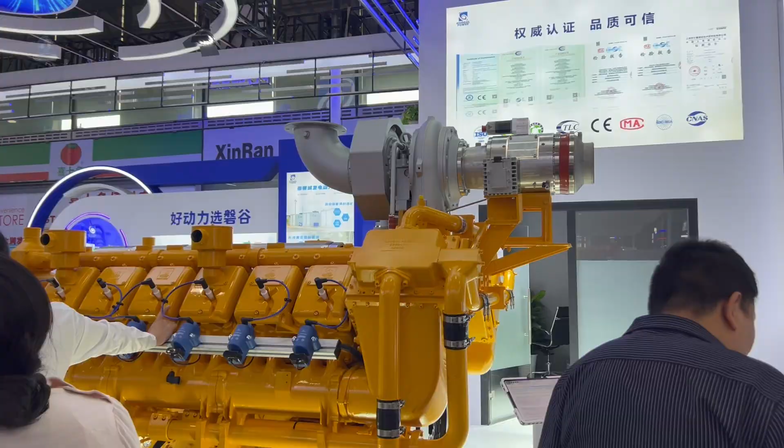Hey guys, welcome back. If you still think China's marine equipment relies on imported core tech, this 2026 SIA Shanghai Marine Expo will completely change your mind.

Brand new domestic gas turbines, upgraded dual fuel generators, and zero-carbon ship systems are now fully mass-producible, ending decades of Western technological dominance in high-end marine power hardware.

For generations, global high-value marine equipment was controlled exclusively by European and American industry giants, with Rolls-Royce, MAN Energy Solutions, and Wärtsilä locking up over 70% of the world's core marine power market before 2025.

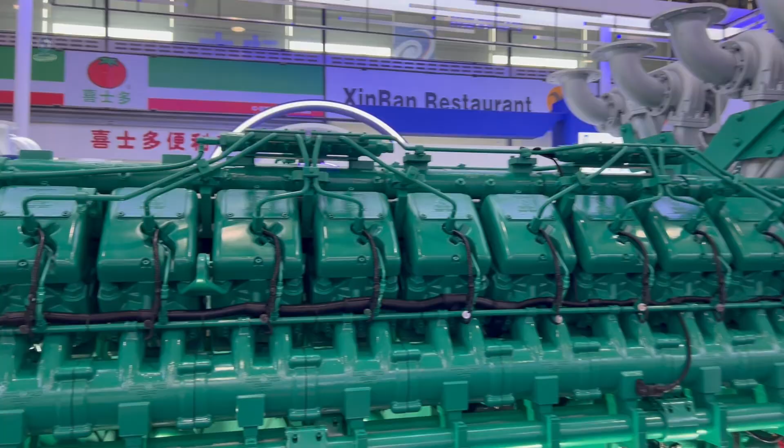These foreign firms controlled every critical link, from high-temperature alloy material formulas and precision processing craftsmanship to intelligent control algorithm frameworks, forcing global shipyards to rely entirely on imported equipment and pay sky-high patent and after-sales fees.

But 2026 marks a definitive turning point. Full-scale domestic technological breakthroughs have shattered long-standing Western monopolies, reshaping the entire competitive hierarchy of the global marine manufacturing industry.

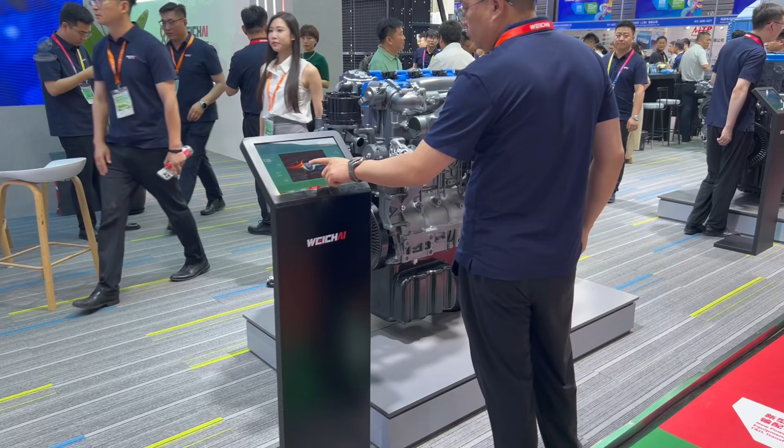Today, we're doing a pure technical deep dive, breaking down every key parameter, performance upgrade, and global industry shift you missed at this exhibition. We'll integrate the latest 2026 authoritative market data, cross-brand global benchmarking, supply chain competition analysis, and long-term industrial forecasts to deliver a fully objective, data-backed industry review.

No corporate PR spin, no exaggerated marketing hype. Only real mass production-ready technology and verified market trends. Let's get straight into the data.

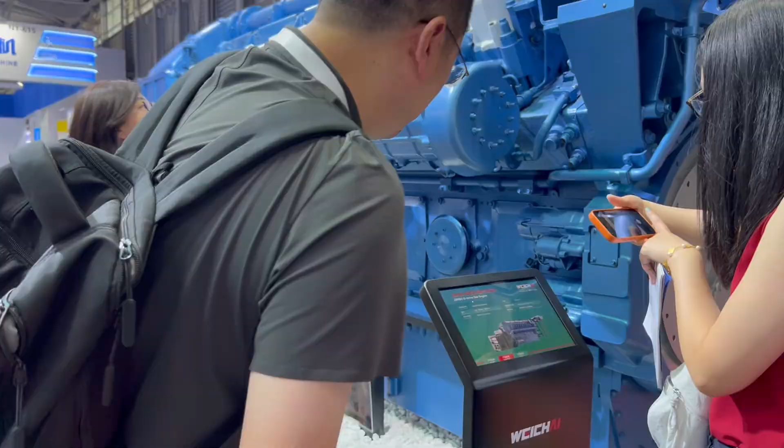I actually flew into Shanghai specifically for this show earlier this week, and the vibe here is completely different from years past. Walking through the vast exhibition halls at Shanghai New International Expo Center, you can instantly feel the shift.

Foreign booths are no longer the center of attention, and crowds are swarming the domestic equipment zones, checking out fully mature, mass-producible marine hardware. The 2026 SIA Shanghai International Ship and Offshore Engineering Equipment Exhibition officially ran from June 3rd to 5th at this venue.

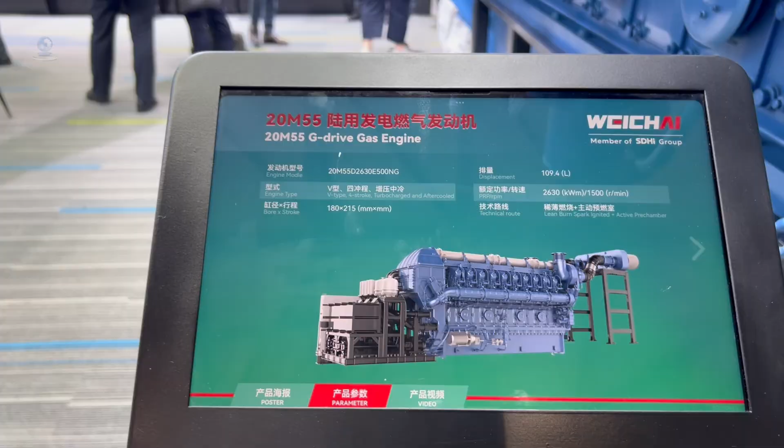As the largest and most influential professional marine industry event in the entire Asia-Pacific region for 2026, this expo covered a total exhibition area of 45,000 square meters, gathering 680-plus top-tier marine equipment manufacturers from 32 countries

and regions worldwide. It attracted over 42,000 professional visitors, including global shipyard procurement teams, offshore energy engineering contractors, maritime operation enterprises, and industry research institutions.

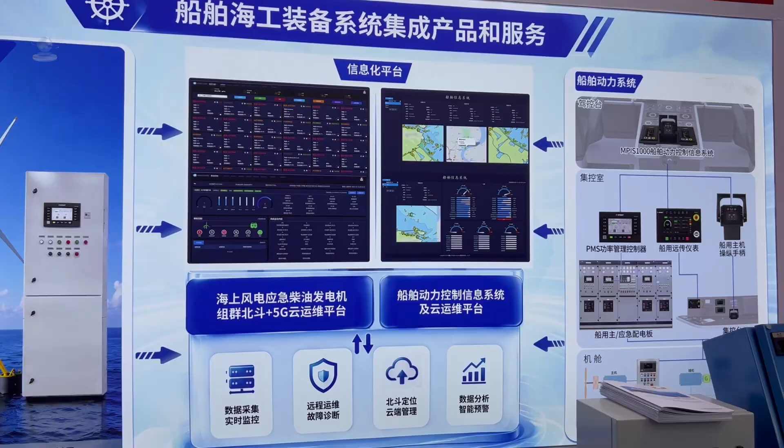Compared with the 2025 exhibition, overseas exhibitor attendance surged by 38%, and on-site intentional transaction volume exceeded $2.8 billion, hitting a 5-year historical high, fully demonstrating its status as a core weather vane for global marine industrial development.

The show focused on 6 core categories: marine gas turbine power systems, large marine generator sets, marine electric propulsion tech, offshore engineering hardware, intelligent shipping solutions, and zero-carbon green ship power systems.

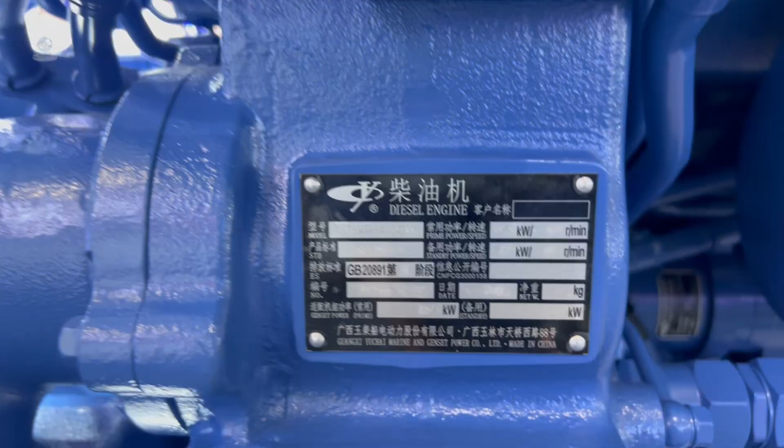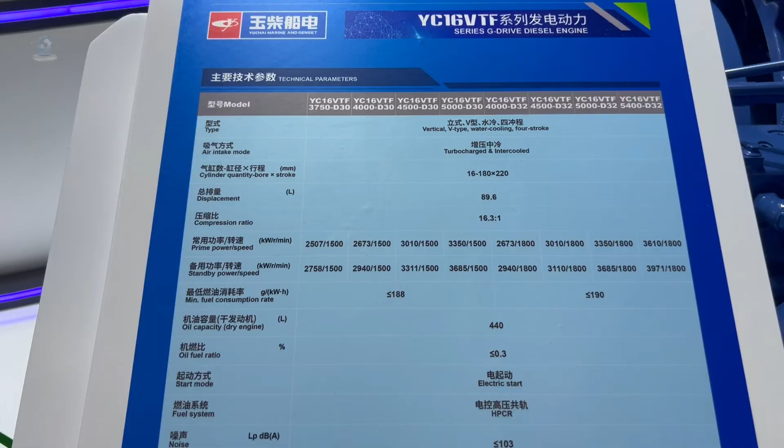Unlike previous expos that prioritized conceptual prototypes and experimental technologies, the 2026 SIA exhibition centered entirely on commercialization, mass production, and practical industrial iteration. Every displayed piece of core equipment has obtained complete International Classification Society certifications, including DNV, ABS,

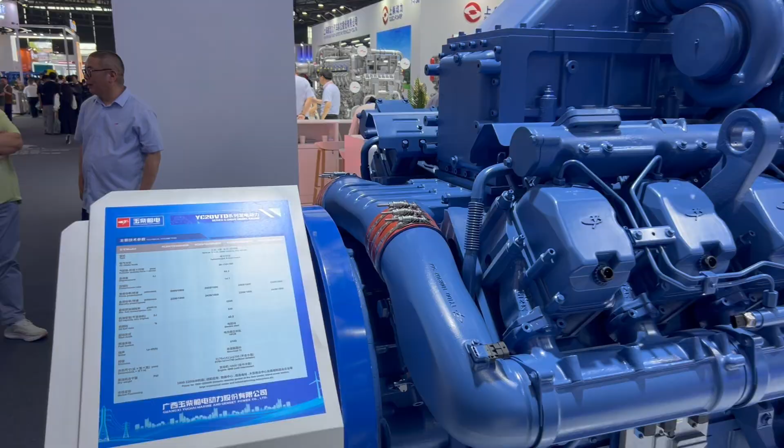and CCS, supporting large-scale batch installation and global shipping operation, representing the highest practical manufacturing level of the current global marine equipment industry. From an objective global industry perspective, this expo perfectly showcases how fast China's high-end marine power and offshore engineering equipment are evolving, and just how much domestic tech has improved in recent years.

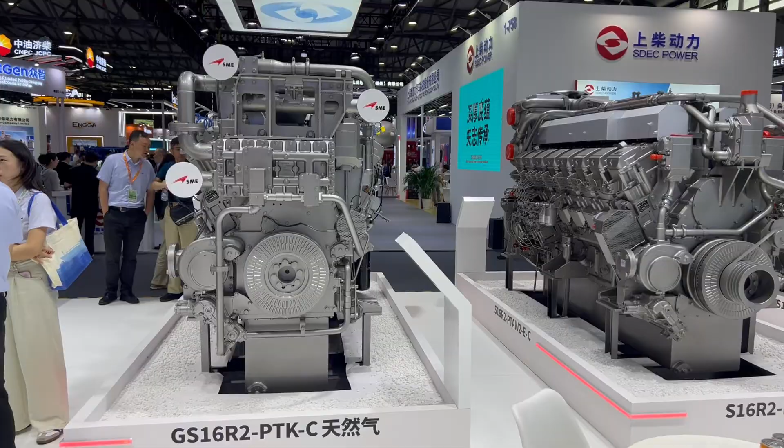According to 2026 authoritative industry data from Clarkson's Research and Coherent Market Insights, the global maritime sector market size has reached $1.72 trillion in 2026, with a projected compound annual growth rate of 5.77% from 2026 to 2035, expected to surpass $3.01 trillion by 2035.

In terms of market competition pattern, China has maintained its position as the world's top shipbuilding and offshore equipment manufacturing country for 16 consecutive years.

By mid-2026, China's global new ship order volume and offshore equipment market share have broken 69%, far outpacing South Korea's 12% and Japan's 8% combined market share.

Most importantly, the localization rate of China's high-end marine core equipment has skyrocketed from 48% in 2023 to over 70% in 2026, marking a historic end to the era of core technology dependence on foreign imports.

Part 1. Marine gas turbine core technology and parameter breakthrough.

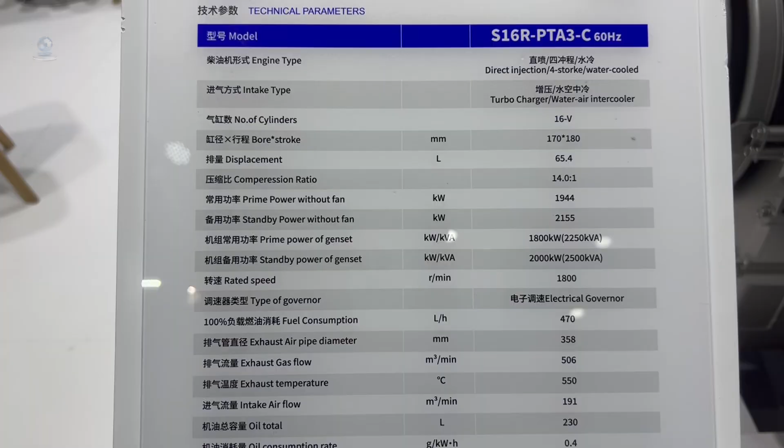Marine gas turbines are widely regarded as the most technically complex core hardware in the marine power space, serving as the ultimate benchmark to measure a country's high-end marine manufacturing comprehensive strength.

Compared to traditional diesel engines, they offer way better power density, faster startup, far less vibration, and cleaner emissions. That's exactly why they're the top choice for ultra-large container ships, LNG vessels, high-speed passenger ships, and advanced offshore engineering vessels.

For decades, the global high-power marine gas turbine market was strictly monopolized by GE's LM-2500 series and Rolls-Royce's MT30 series, with Western brands controlling over 90% of global market share and imposing strict technical blockades and patent barriers on emerging manufacturing countries.

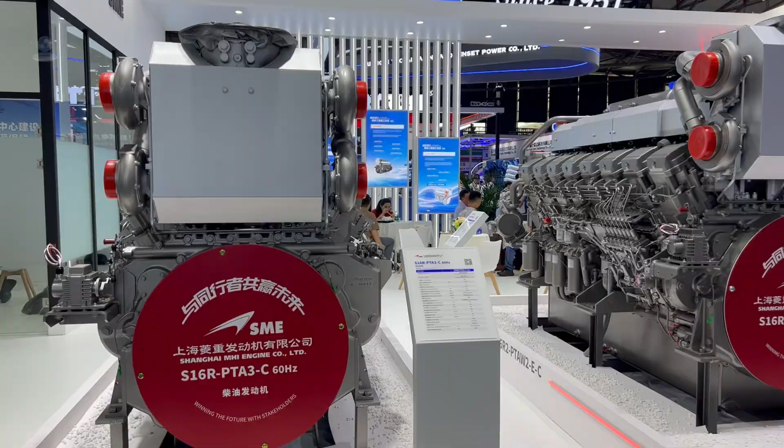The 2026 SIA exhibition completely breaks this long-term monopoly with fully localized, mass production-ready domestic gas turbine models. At this SIA exhibition, the upgraded domestic heavy-duty gas turbine model GD25000 was fully displayed, representing the pinnacle

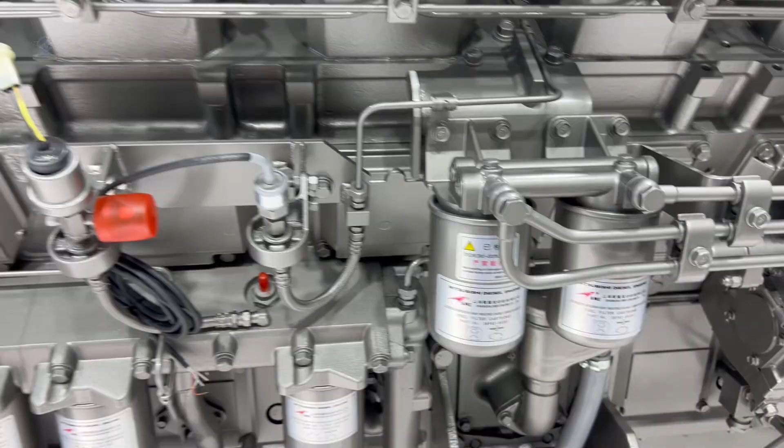of China's independent research and manufacturing capabilities for heavy-duty marine gas turbines.

The improved GD25000 unit reaches a rated power of 25 megawatts, equivalent to 34,000 horsepower. Its standalone thermal efficiency reaches 38.5%.

The combined cycle comprehensive thermal efficiency breaks 52%. The unit's stable operating speed is 3,000 revolutions per minute, with a stable exhaust temperature controlled at 520 degrees Celsius. This core performance index is completely comparable to GE's mainstream LM-2500 gas turbine, reaching the world's advanced level, and even

surpassing foreign products in comprehensive energy efficiency and operational stability. This gas turbine supports dual fuel switching between diesel and LNG. Its NOx emission index is controlled below 100 milligrams per cubic meter, fully meeting the latest IMO Tier 3 international marine emission standards. The total weight of the complete unit is controlled within 18 tons, achieving extremely high power density performance. This model is mainly applicable to 15,000 plus TEU super large container ships and large offshore engineering platform power systems, perfectly solving the long-standing high power supply bottleneck for China's ultra-large marine equipment.

In addition to heavy-duty gas turbines, the exhibition also displayed the QD70 aviation-derived light-duty gas turbine, filling the long-term domestic gap in high-performance light marine gas turbine equipment. The QD70 light gas turbine achieves a rated power of 7 megawatts, with a comprehensive thermal efficiency of 35%. The overall dimension is 3.2 meters in length, 1.8 meters in width, and 2.1 meters in height, with a total weight controlled under 6.5 tons.

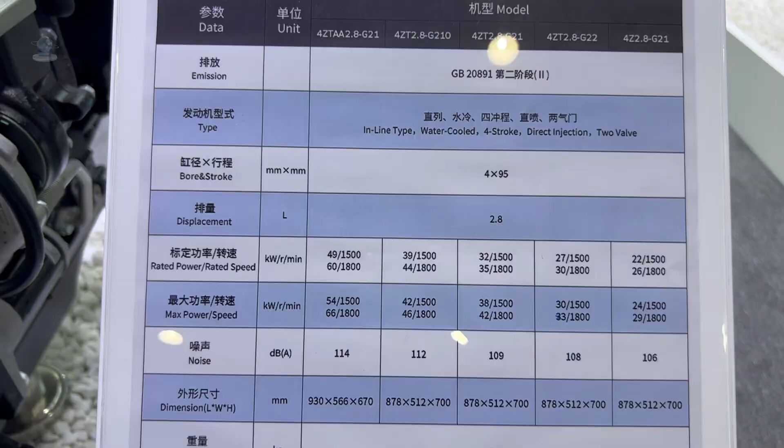Its ultra-compact structural design enables flexible installation in narrow cabin spaces that traditional heavy-duty power equipment cannot adapt to. Its core advantage lies in ultra-fast startup response, completing full startup and stable power output within 60 seconds, a 15% speed improvement over equivalent European light gas turbine products. This lightweight gas turbine is highly suitable for high-speed passenger vessels, luxury yachts, and emergency power supply systems for special operation ships, providing reliable instantaneous power guarantee for marine navigation safety and emergency response scenarios.

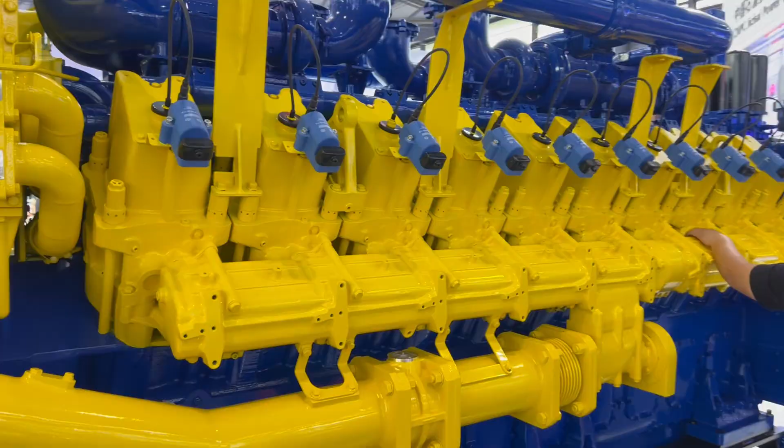When it comes to core manufacturing breakthroughs, these next-gen marine gas turbines no longer rely on imported high-temperature critical parts. They're equipped with brand-new domestic 1600 single-crystal high-temperature alloy blades paired with ceramic matrix composite CMC thermal barrier coatings. This ultra-thin 0.305 mm coating boosts high-temperature oxidation resistance by 40% and raises the blade's heat tolerance significantly, fixing one of the biggest pain points for long-term high-load ocean operation and extreme sea condition adaptation.

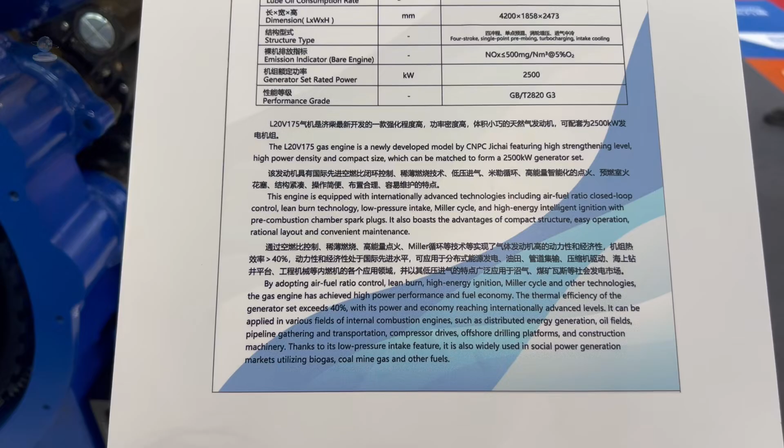These blades are built using precision lost wax casting and 5-axis linkage finishing processes, holding surface precision within 0.02 mm and pushing overall turbine efficiency 1.2% higher. This is a full break from Western material monopolies we've seen for decades.

Previously, only the United States and the United Kingdom mastered 1600 plus marine single crystal blade manufacturing technology, with Western manufacturers imposing strict technical embargoes and high patent licensing fees. In 2026, China's fully independent blade batch production line has achieved stable delivery, cutting core component costs by 35% and shortening equipment delivery cycles from 18 months to 6 months, forming strong cost and efficiency advantages in global market competition.

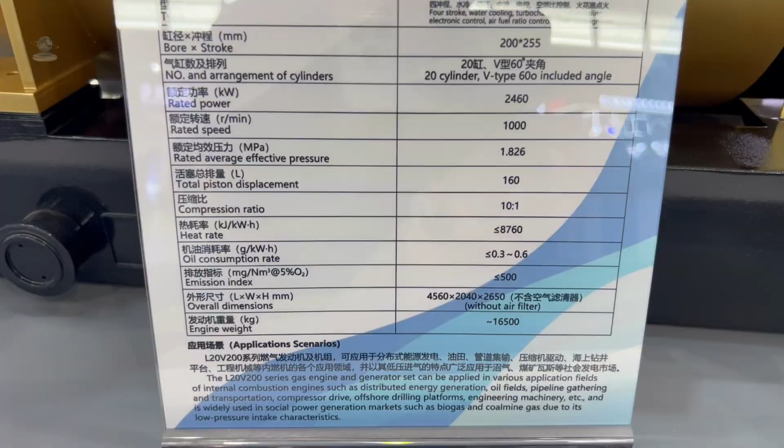On top of new materials, these turbines use advanced dry low NOx adaptive combustion technology to maintain clean, stable combustion across all load levels, solving the unstable combustion and excessive emission problems of traditional gas turbines under low load and variable sea conditions. Paired with AI-powered fault diagnosis and remote operation systems, they extend mean time between failures to over 8,000 hours, drastically boosting reliability for long-distance ocean voyages.

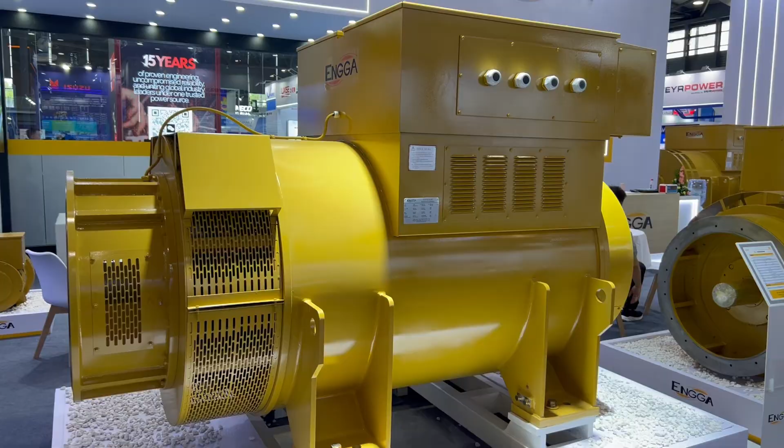Honestly, seeing the GD25000 up close gave me chills. 10 years ago, this level of domestic heavy-duty marine gas turbine tech was nothing but a rough blueprint stuck in closed-door lab tests. Western analysts even claim China would need at least another decade to break the material and process barriers. Now, it's sitting right here on the exhibition floor, fully assembled, tested, and ready to power the world's biggest container ships and offshore platforms. That's a massive industrial flex no one can ignore.

To put its competitiveness in perspective, let's do a head-to-head real-world benchmark with the global gold standard GE's LM2500. The American classic hits 33.6% standalone thermal efficiency and maxes out at 51.2% combined cycle efficiency, while our GD25000 beats those numbers handily at 38.5% and 52% respectively. The LM2500 weighs nearly 20 tons, while the domestic unit cuts weight down to 18 tons for higher power density.

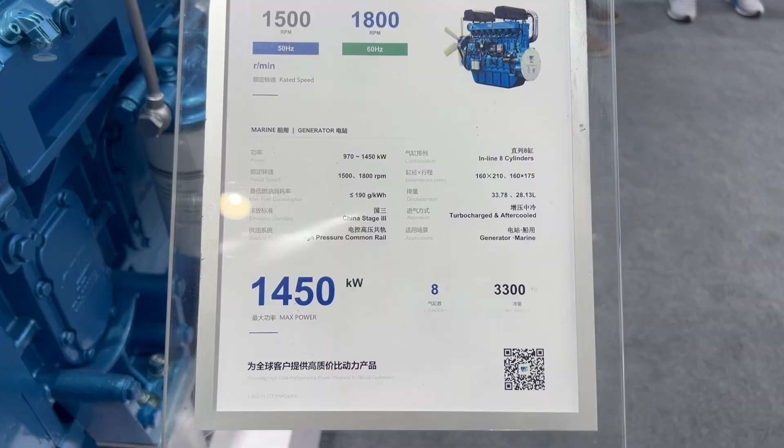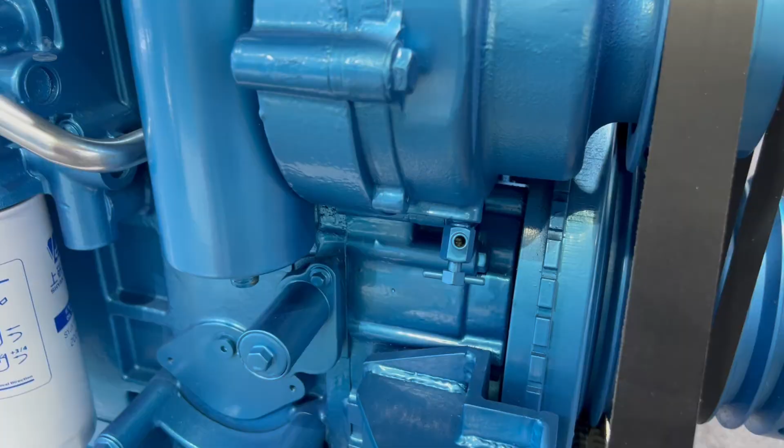Emission-wise, both meet IMO Tier 3, but the GD25000's adaptive combustion system delivers far more stable low-load performance in rough, variable ocean conditions. According to 2026 global marine power equipment bidding data, domestic gas turbines have officially entered the global open bidding market, capturing 12% of Southeast Asian and Middle Eastern marine engineering equipment orders in the first half of 2026, with overseas market penetration growing steadily month by month and gradually eroding the long-term dominant market share of Western brands.

Marine dual-fuel generator set technical parameters and performance upgrade. Marine generator sets are the backbone of every ship's electrical system, responsible for all onboard equipment operation, navigation support, and living power supply. In the maritime industry, there's no compromising on stability, low fuel consumption, low noise, clean emissions, and long service life. And these new gen units nail every single one of these metrics.

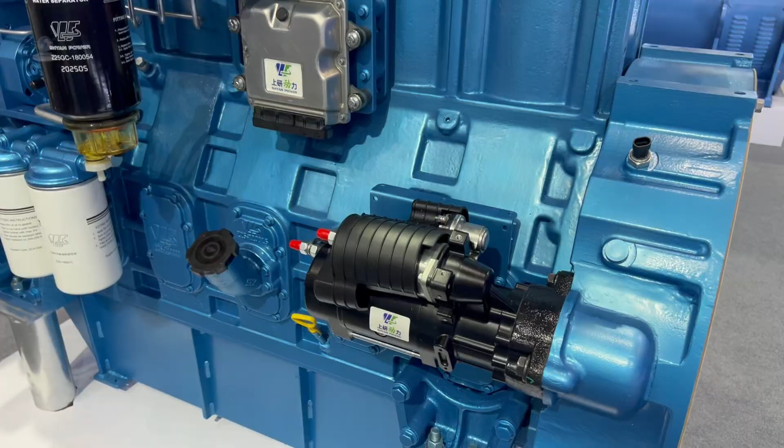Now, let's talk money. The numbers behind these engines are just as impressive as their technical specs.

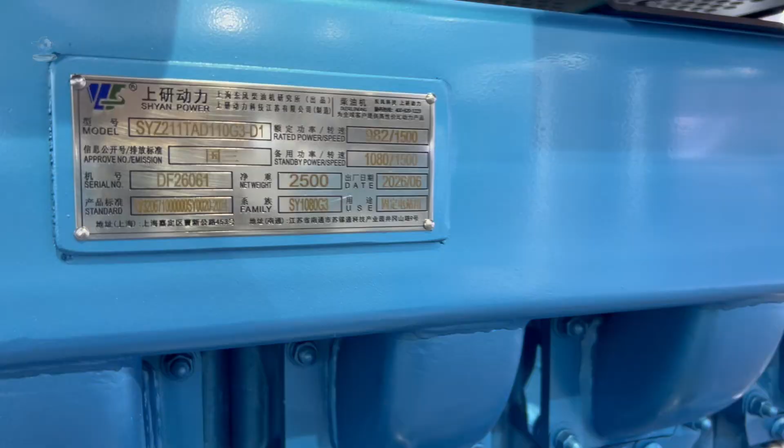We're looking at a $14.82 billion global marine engine market in 2026 alone, and low-carbon dual-fuel power equipment is absolutely dominating growth here. It's hitting an 8.3% year-on-year increase, which blows traditional diesel engine growth rates out of the water. Every major shipping line is pivoting hard to dual-fuel hardware right now, and this Chinese tech is perfectly timed to capture that booming demand.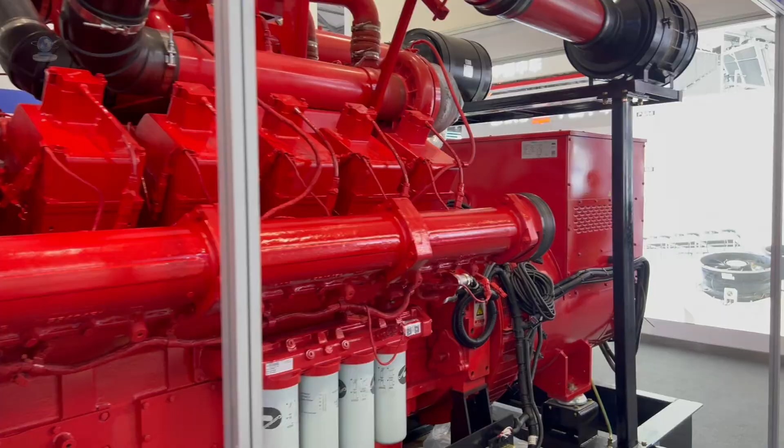The rated comprehensive power reaches 9,200 kilowatts, equivalent to 12,500 horsepower, with a rated stable operating speed of 600 revolutions per minute. The average effective operating pressure reaches 2.4 megapascals, with stronger load impact resistance and operational stability than foreign similar products. It switches seamlessly between diesel and LNG dual-fuel modes.

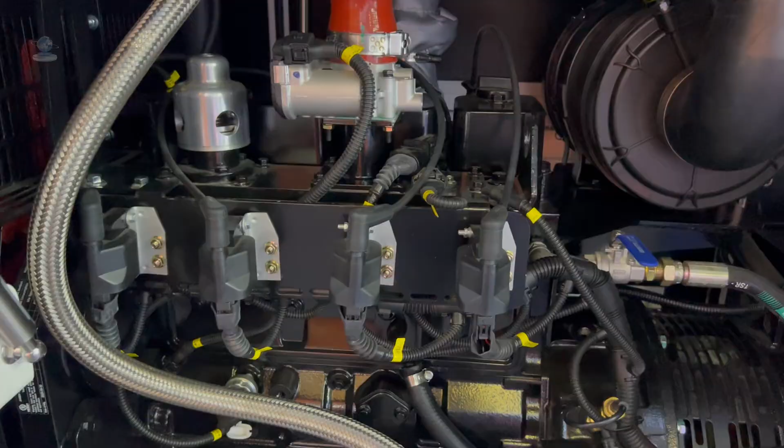On pure diesel, fuel consumption sits at 185 g/kWh, but switch over to clean LNG and it drops all the way to 145 g/kWh. That's massive cost savings for long-haul shipping runs. According to 2026 shipping enterprise operational cost data, a 220,000-ton bulk carrier equipped with this unit can save approximately $220,000 in annual fuel costs, while reducing carbon emissions by 28%, achieving a perfect balance between economic benefits and green environmental protection.

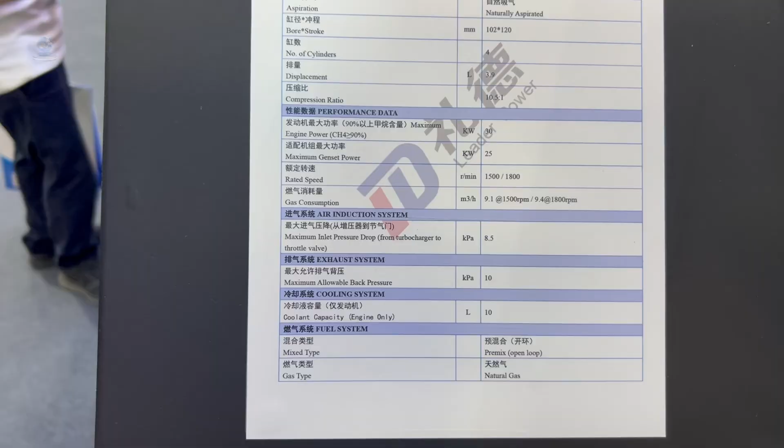What really stands out is its brand new lean burn closed-loop combustion control process. It automatically tweaks the air-fuel ratio based on load, speed, and sea temperature, pushing combustion efficiency up to 98.8% and completely fixing the low-load carbon buildup issue that plagues older dual-fuel engines. Combined with a low-temperature SCR denitrification process, it keeps denitrification efficiency above 95% even in low-temperature conditions, fully meeting IMO Tier 3 global emission standards.

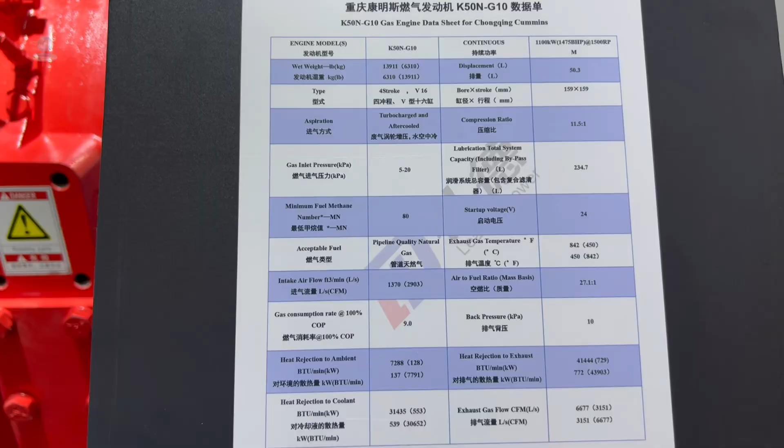This large-bore dual-fuel generator set is mainly used in large container ships, luxury cruise ships, and core power generation systems of offshore engineering platforms. Up to mid-2026, this equipment has obtained cumulative batch orders for 136 units from domestic and foreign shipyards, with overseas orders accounting for 42% of the total, covering Southeast Asia, the Middle East, and European regional shipbuilding markets.

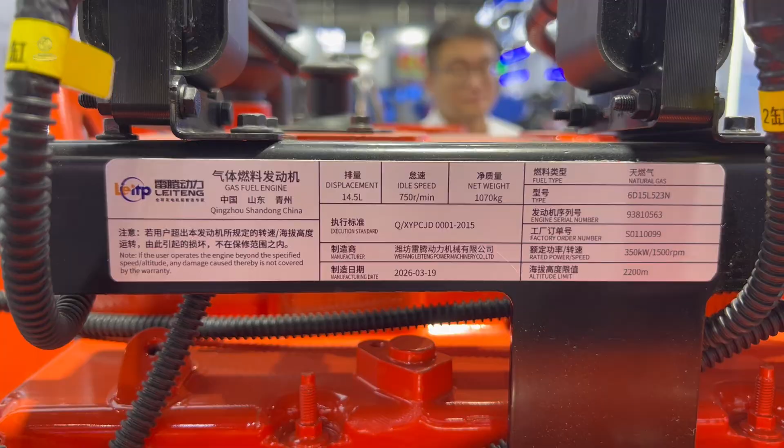The complete unit has a compact layout size of 2.8 meters in length, 1.2 meters in width, and 1.5 meters in height, with a total weight within 3.8 tons. The 1-meter noise test data is stably controlled below 95 decibels, effectively reducing cabin noise pollution and improving crew navigation comfort. It is widely used in bulk carriers, oil tankers, fishing boats, and ship auxiliary power supply scenarios covering the mid to low-end civil ship market, forming full market coverage together with high-power large bore units.

In terms of marine intelligent power station system integration, the exhibited new generation marine power management system supports multi-level voltage platforms of 400 volts, 690 volts, and 11 kV, with a standard operating frequency of 50 Hz or 60 Hz. The system power coverage ranges from 500 kilowatts to 20 megawatts, covering almost all types of civil and engineering ships.

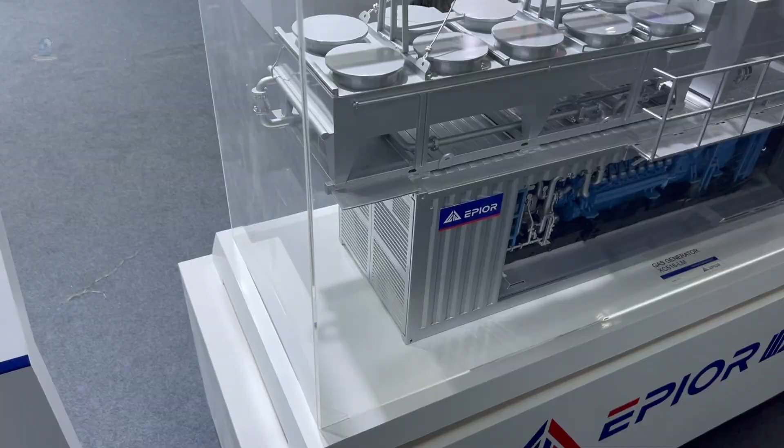Before 2025, high-end marine intelligent power management systems were fully monopolized by Wartsila and Siemens, with imported equipment procurement costs 40% higher than domestic products and extremely expensive after-sales maintenance fees. The 2026 upgraded domestic system realizes full independent research and development of core software and hardware, completely breaking foreign technical barriers. The whole system adopts a PLC plus SCADA plus AI intelligent energy management architecture.

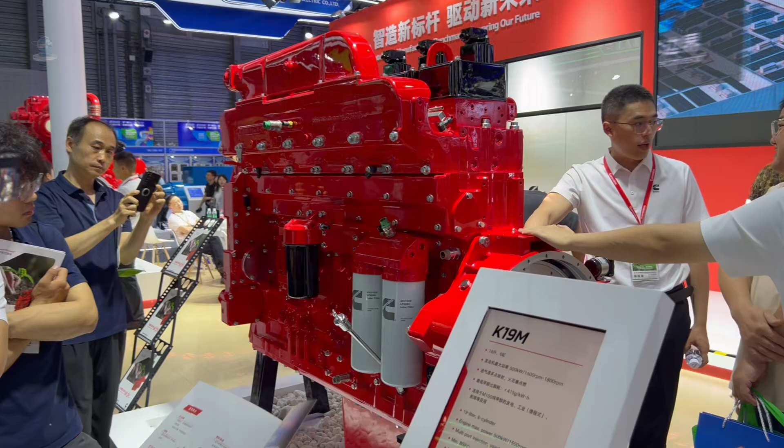The parallel operation accuracy strictly controls voltage deviation within 1%, frequency deviation within 0.1 Hz, and phase difference within 5 degrees. The whole cabinet protection level reaches IP54 for cabin interior equipment and IP65 for outdoor equipment, adapting to harsh marine environments such as high salt fog, high humidity, and strong corrosion.

It realizes fully automatic parallel connection, intelligent load balancing, automatic fault recovery, remote real-time monitoring, and predictive maintenance functions, greatly reducing manual operation costs and navigation failure risks during ship operation.

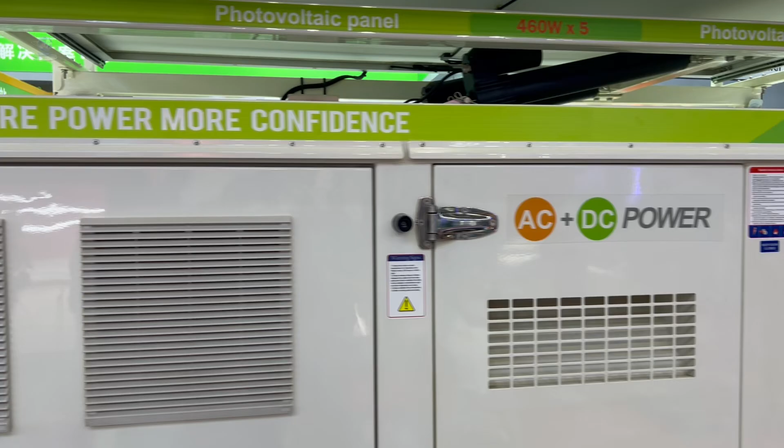According to real ship test data in Q1 2026, this intelligent power station can reduce ship electrical system failure rates by 32% and cut annual operation and maintenance costs by 27%, with comprehensive performance exceeding imported mainstream products of the same grade. At present, this system has been batch applied to 86 newly built large ships and has obtained International Mainstream Classification Society certifications, qualifying for global large-scale promotion.

Marine medium voltage electric propulsion system technical advantages: Electric propulsion systems have officially become the new standard for modern green, smart ships. They outperform traditional mechanical propulsion in every key area—wider speed range, way less vibration and noise, flexible layout options, and redundant safety design that makes ocean voyages far more reliable.

According to 2026 global shipbuilding statistics, the penetration rate of electric propulsion systems in newly built large commercial ships has exceeded 65%, and it is expected to break 80% by 2028, completely replacing traditional mechanical propulsion systems in the high-end ship market.

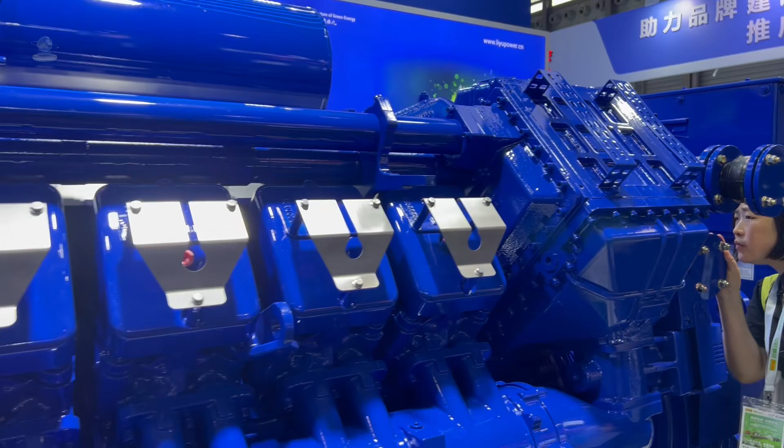The 11 kV medium-voltage marine electric propulsion system displayed at the exhibition covers a power range of 5 megawatts to 30 megawatts. The variable frequency drive comprehensive efficiency is higher than 98.5%, and the matching permanent magnet propulsion motor efficiency reaches more than 97%. The whole system power factor is stably above 0.95, and the total harmonic distortion rate is controlled below 5%, far lower than international marine standard limits, effectively avoiding harmonic interference to precision ship electronic equipment.

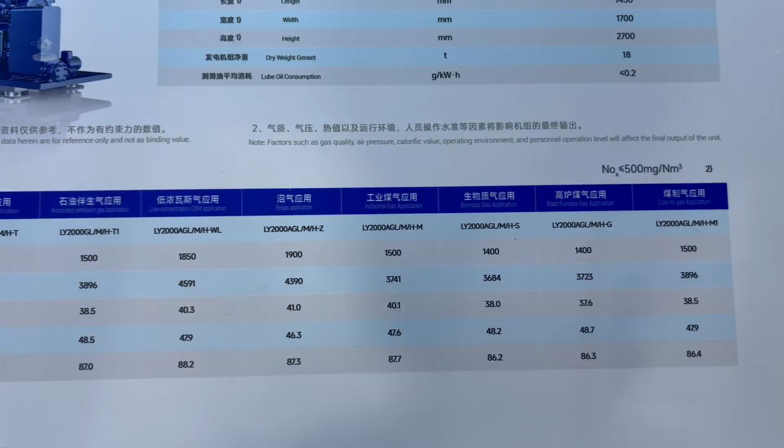This high-standard medium-voltage propulsion system is widely applicable to ultra-large container ships, LNG ships, luxury cruise ships, and deep-sea offshore engineering platforms, providing high efficiency, low consumption, and high stability power support for high-end marine equipment.

This year's upgraded permanent magnet synchronous propulsion motors range from 1 megawatt to 5 megawatts, running steadily between 100 and 300 revolutions per minute, with a peak overall efficiency of 97.5% — that's 2% to 3% higher than traditional asynchronous motors.

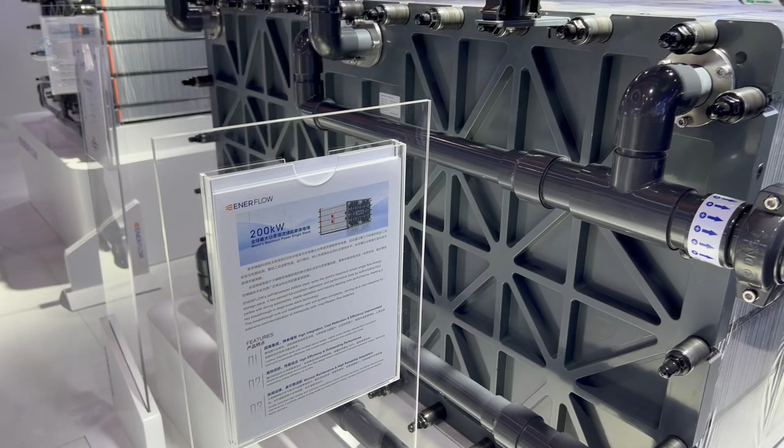The biggest upgrade here is the nanocrystalline soft magnetic material stator, which cuts core iron loss by 25% and is the main reason for this huge efficiency jump. It also uses a brand new segmental laminated insulation packaging process, tripling partial discharge resistance and extending insulation lifespan past 150,000 hours. With 2.5 kilowatts per kilogram power density and IP56 waterproof and dustproof protection, it supports both water and air cooling for maximum flexibility.

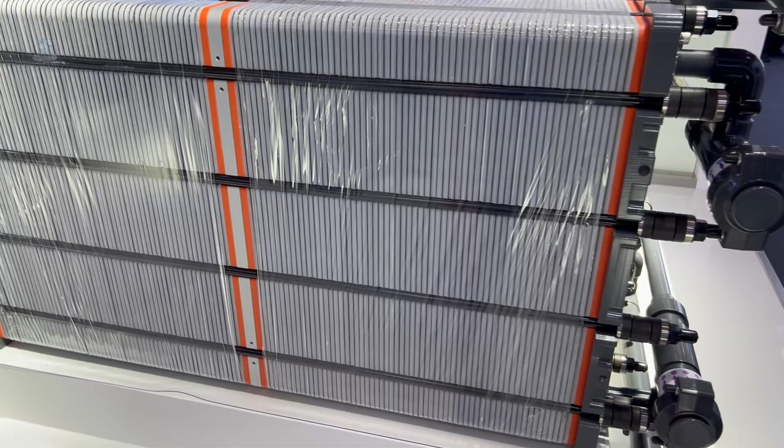Global benchmarking data shows that European and South Korean equivalent propulsion motors have a maximum efficiency of only 95.2% with a service life of less than 120,000 hours. The 2026 domestic upgraded model achieves obvious leading advantages in energy efficiency and durability, with unit manufacturing costs 22% lower than imported products, possessing strong global cost-performance competitiveness.

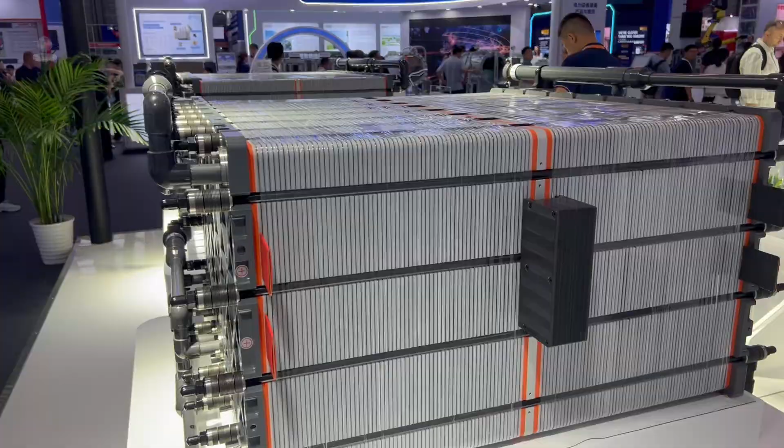This series of permanent magnet propulsion motors effectively reduces ship body weight, saves ship cabin space, reduces overall ship energy consumption by 12% to 18%, and lowers daily operating costs, bringing significant economic and environmental benefits for ship operation and helping shipping enterprises further reduce carbon emission pressure.

Offshore engineering and deep-sea energy equipment display.

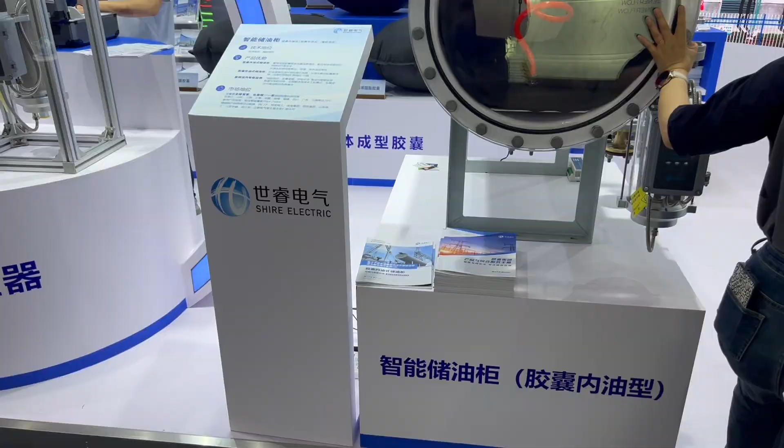In the offshore engineering equipment exhibition area, the 15 megawatt large offshore wind turbine independently developed in China was displayed on site, representing the world's top level of large-scale offshore wind power equipment manufacturing. Driven by global dual carbon goals, the offshore new energy industry has exploded in recent years, becoming the core growth track of the global marine engineering market.

This turbine features a 242-meter rotor diameter and a 150-meter hub height, cranking out over 60 GWh of electricity every year. It starts generating power at just 2.5 meters per second wind speed and can survive extreme 70 meters per second winds, holding up even against super typhoons far offshore.

Its massive blades are built with carbon fiber hybrid glass fiber composite materials, weighing 18% less while boosting bending strength by 32% compared to standard glass fiber blades. The surface is coated with a nano-hydrophobic anti-icing layer, which drastically improves anti-icing performance in humid, frigid marine environments and keeps it generating power for more hours every year, increasing annual power generation efficiency by more than 8%.

The matching offshore wind installation vessel is 99 meters long and 34 meters wide, fitted with a 110-meter pile frame. It offers a 1,000-ton maximum lifting capacity, can drive piles up to 95 meters deep, and handles foundation piles up to 3 meters in diameter. Thanks to its dynamic positioning and pile frame synchronous calibration process, it keeps installation error within 5 mm even in rough, choppy seas, enabling fast, precise foundation and jacket installation in tough offshore conditions.

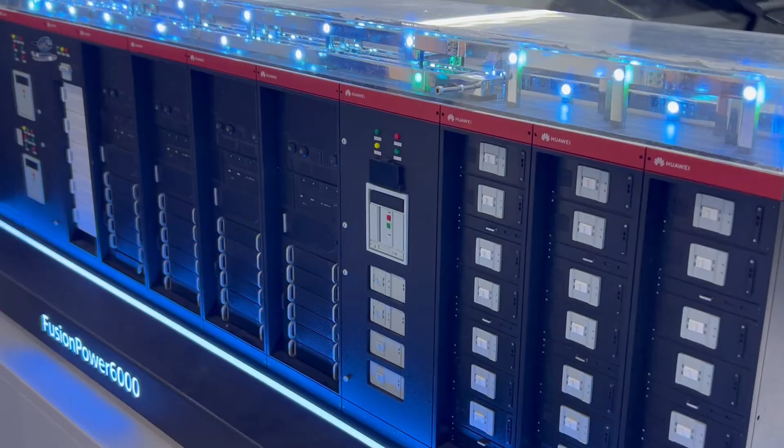According to 2026 global offshore wind construction data, China's offshore wind installation capacity accounts for 75% of the world's total. This new installation vessel can improve offshore wind farm construction efficiency by 40% and reduce single project construction costs by 18%, effectively solving the global industry pain points of high cost, low efficiency, and harsh construction conditions in deep-sea wind power projects.

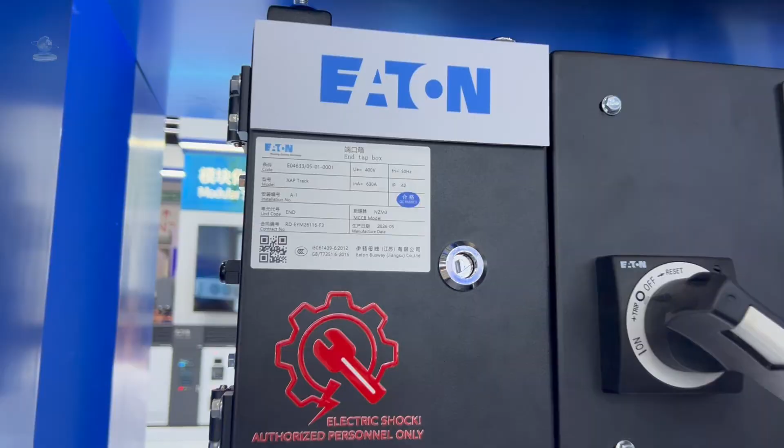In the deep-sea oil and gas engineering sector, the sixth-generation semi-submersible drilling platform exhibited has a working water depth of 3,000 meters and a maximum drilling depth of 12,000 meters. The ship boasts a 4,000-ton variable load capacity and uses a mature DP3 dynamic positioning and anchor mooring dual positioning system. It can stably resist 17-level typhoons and 15-meter huge waves, suitable for deep-sea oil and gas exploration operations in the South China Sea, Brazil Sea area, and West African Sea area.

I want to highlight a critical detail most industry reviewers miss: operational environment difficulty. A lot of people praise European offshore equipment for reliability, but most European North Sea operations face mild, predictable sea conditions with limited typhoon activity and relatively stable water temperatures.

The South China Sea, by contrast, is one of the harshest marine environments on the planet. It's notorious for sudden super typhoons, violent seasonal swells, complex underwater current systems, and high salt corrosion year-round. If offshore hardware can survive and operate stably in the South China Sea, it can handle any offshore site across the globe.

That's why this sixth-generation platform is such a game-changer. It's not just built for standard offshore operations, it's hardened for the worst possible ocean conditions.

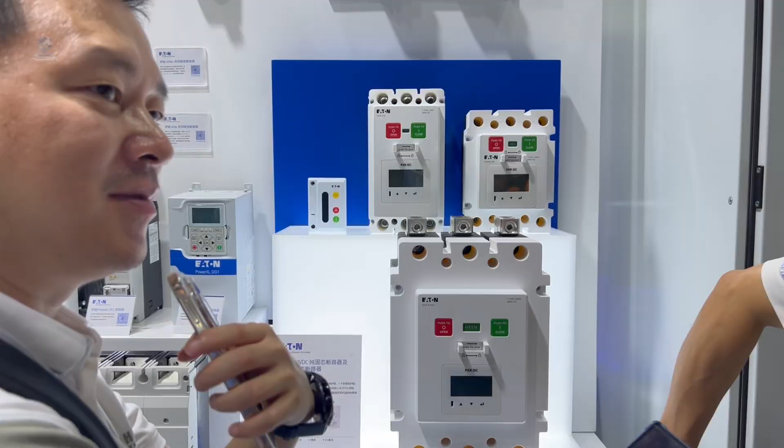At present, only a handful of countries including China, the United States, and Norway have mastered sixth-generation deep-sea semi-submersible platform technology. In the 2026 global deep-sea engineering equipment bidding market, Chinese-made sixth-generation platforms have won 45% of global new orders, surpassing Norway's Aker Solutions to rank first in the world in delivery volume.

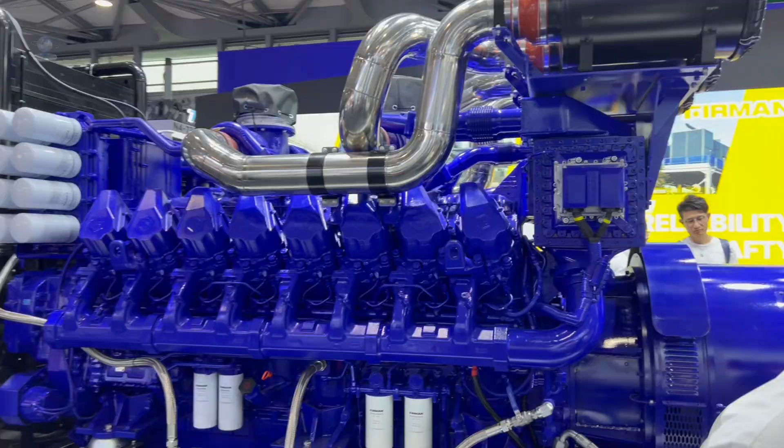In the emerging deep-sea mining equipment sector, the exhibited deep-sea intelligent mining system supports an operating depth of 2,000 to 6,000 meters, with hourly mining capacity of 300 to 500 tons and a collectible ore particle size of 2 to 50 millimeters. The total system operating power reaches 5 to 10 megawatts. It integrates crawler walking, hydraulic conveying, intelligent obstacle avoidance, and remote precise control technologies, representing the cutting-edge level of global deep-sea mineral resource development equipment.

With the accelerated development of global deep-sea mineral resources, the international deep-sea mining equipment market size is expected to exceed $32 billion in 2026. China's self-developed intelligent mining system has broken the long-term technical monopoly of European and American enterprises, filled the domestic gap in high-precision deep-sea mining equipment, and obtained commercial trial orders from international ocean resource development organizations, laying a foundation for China's layout in global deep-sea resource development.

5. Intelligent shipping and zero-carbon green vessel technology.

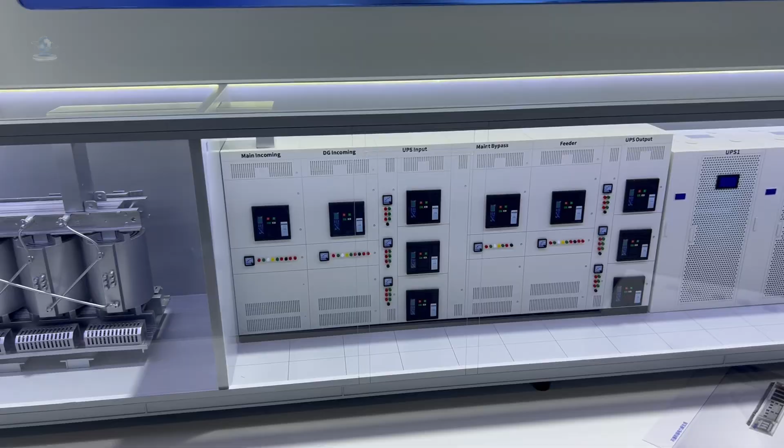When it comes to smart shipping, the upgraded autonomous navigation system completely raises the bar for maritime intelligent travel. It fuses Beidou, differential GPS, and inertial navigation tech to achieve sub-meter positioning accuracy under 0.5 meters, with obstacle avoidance response locked in under 2 seconds. It supports both L3 conditional and L4 high-level autonomous navigation for all kinds of sea conditions.

According to 2026 Global Intelligent Shipping Industry Statistics, the global penetration rate of L4 level full autonomous navigation in commercial ships is less than 8%, while China's upgraded system has achieved stable commercial application on coastal ferries and inland river cargo ships, with cumulative safe operation mileage exceeding 2 million nautical miles. And its safety accident rate is far lower than the global industry average.

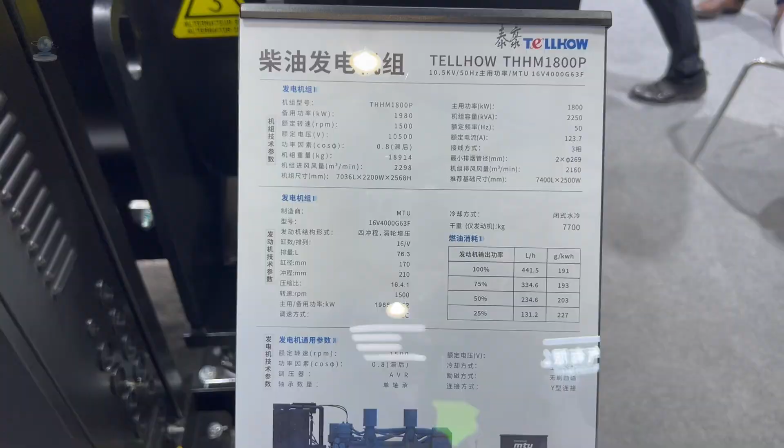The system adopts 5G plus satellite plus ship-shore private network triple communication guarantee, realizing automatic route planning, intelligent wave avoidance, real-time remote monitoring, and automatic fault recovery functions, greatly improving the intelligence level and navigation safety of modern ships.

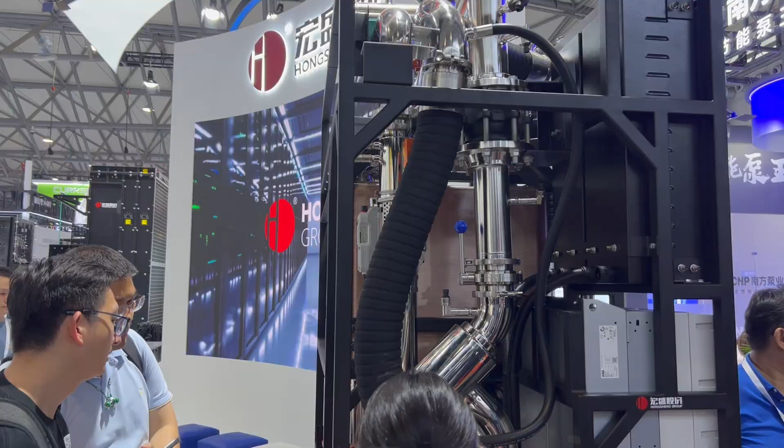On the zero-carbon power front, the 6S50 MEC ammonia fuel marine engine hits 12,000 kilowatts rated power at 105 revolutions per minute. Running purely on liquid ammonia, it delivers nearly zero carbon emissions, with NOx emissions strictly capped at below 50 milligrams per cubic meter.

And here's the clever part, they fixed the ammonia cracking process. Why does that matter? Because old ammonia-powered marine engines had 2 fatal flaws. First, they burned ammonia super inefficiently, wasting massive amounts of fuel and driving up operational costs. Second, they leaked excessive N2O, a greenhouse gas way more potent than CO2, that defeats the whole purpose of green shipping. This new design kills both problems at once.

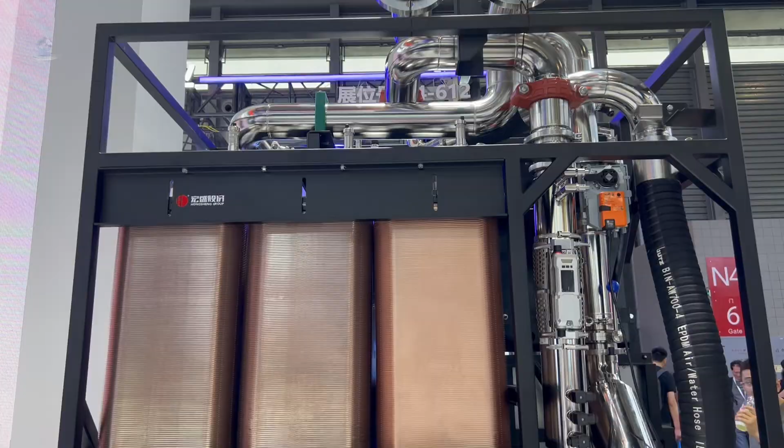It uses an innovative ammonia fuel high-temperature cracking suppression process to lock in efficient, clean combustion. It's fully built for 200,000-ton bulk carriers and large container ships.

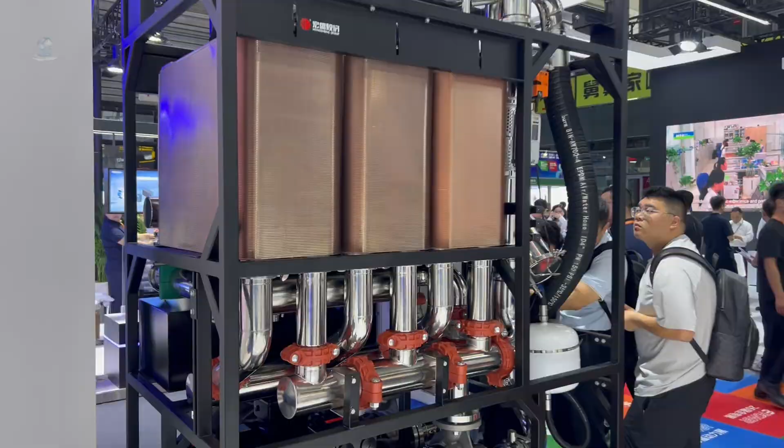As global maritime emission regulations become increasingly stringent, zero-carbon ship power has become the core competitive track for major shipbuilding countries. Official 2026 IMO data shows that global shipping carbon emissions need to be reduced by 40% by 2030, driving the rapid iteration and popularization of ammonia, hydrogen, and methanol clean power equipment. At present, China's ammonia-fueled engine mass production technology is 12 months ahead of South Korean and European competitors, occupying a clear first-mover advantage in the global zero-carbon shipping market.

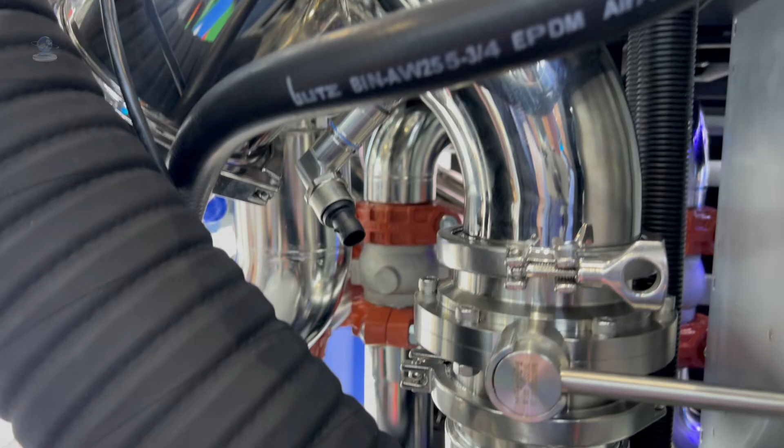It delivers 200 to 500 kilometers of continuous sailing range, perfect for inland ferries, sightseeing boats, and port tugboats. With the continuous reduction of hydrogen energy costs and the improvement of industrial supporting facilities, marine hydrogen fuel cell systems will achieve large-scale popularization in short-distance shipping scenarios within the next 2 years.

6. Global Industry Trend Summary.

Looking at this expo from an objective international standpoint, 3 clear industry trends stand out, all fully supported by 2026 authoritative global industry data and real market changes. First, China is rapidly boosting localization of core marine power equipment. Heavy-duty gas turbines, high-power dual-fuel engines, and medium-voltage electric propulsion systems are now fully independent and controllable, with overall domestic localization rates surpassing 70%.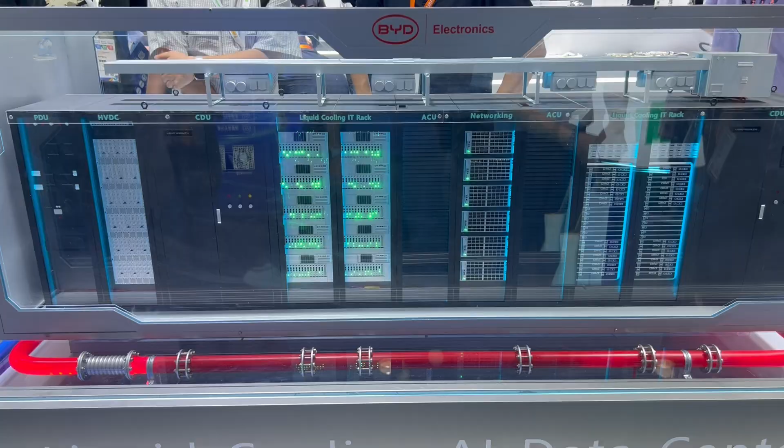Breaking down the global competition pattern, the high-end marine power equipment market, once completely monopolized by European, American, and South Korean giants, has undergone a fundamental reshuffle. In the first half of 2026, Chinese manufacturers have seized 35% of the global high-end marine power equipment market share. In the core offshore engineering equipment field, China's new order volume accounts for 69% of the global total, firmly ranking first in the world, while the market shares of South Korea and Japan continue to shrink, with their technical advantages gradually limited to individual high-end LNG ship segments.

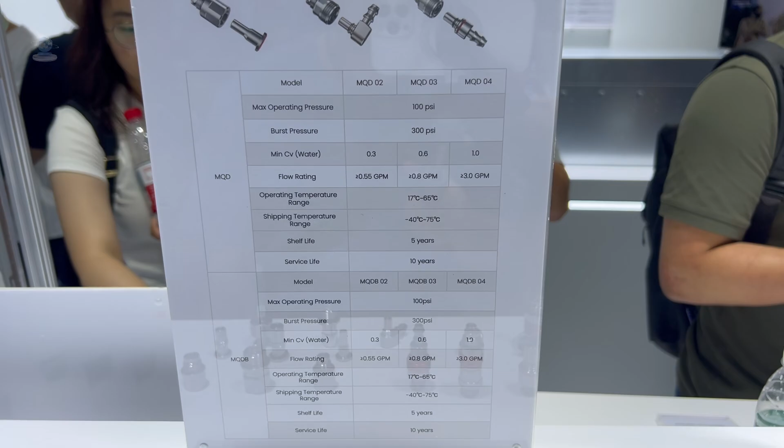Low-carbon and zero-carbon shipping is no longer a future concept, it's an irreversible global trend. LNG, ammonia, hydrogen, and methanol clean power are quickly replacing traditional diesel engines. According to Clarkson's 2026 latest forecast, by 2030 over half of all newly built ships will run on low or zero-carbon power solutions, and the global zero-carbon marine equipment market size will soar to $74 billion. At present, China's zero-carbon ship power equipment has achieved batch mass production. The number of zero-carbon new ship orders received by Chinese shipyards in the first half of 2026 accounts for 52% of the global total, leading the global green shipping transformation process.

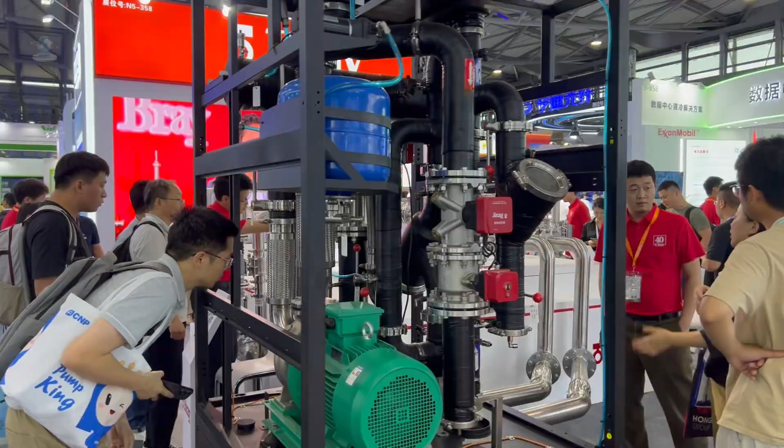Digital smart tech has fully penetrated the shipping industry. Digital twin ships, remote maintenance, AI fault diagnosis, and autonomous navigation systems are cutting overall ship operating costs by 20% to 30%. 2026 Global Maritime Industry Cost Analysis data shows that intelligent system transformation can reduce the annual comprehensive operating cost of a single large ship by $180,000 to $350,000, while significantly improving navigation safety and equipment stability. China's intelligent shipping solution market penetration rate has reached 41%, far exceeding the global average level of 22%, becoming the core driving force for global maritime intelligent upgrading.

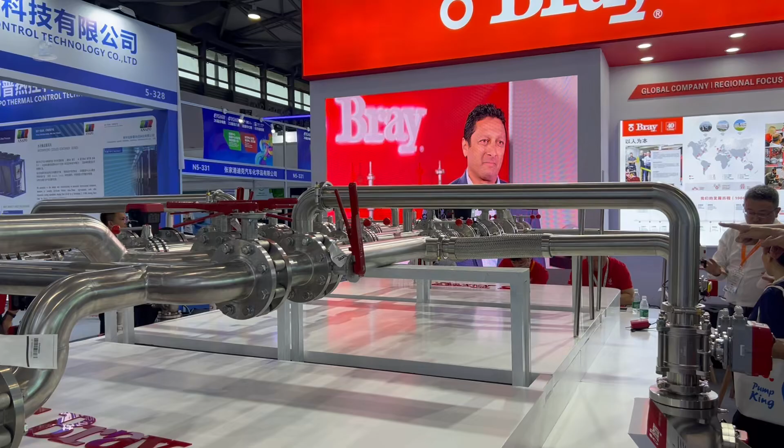At the same time, global deep-sea resource development and offshore new energy construction are speeding up, pushing marine engineering equipment to handle higher power, deeper water depths, and harsher extreme environments. The global offshore wind and deep-sea mining engineering market will maintain a 6.2% annual growth rate from 2026 to 2030, bringing huge incremental market space for high-end marine engineering equipment. Relying on a complete industrial chain layout, mature mass production capacity, and cost-effective technical solutions, Chinese marine equipment manufacturers are accelerating global market layout, continuously squeezing the market space of traditional Western brands.

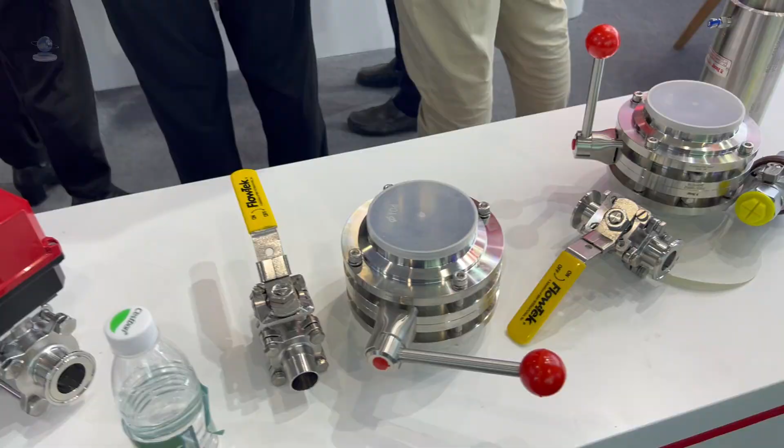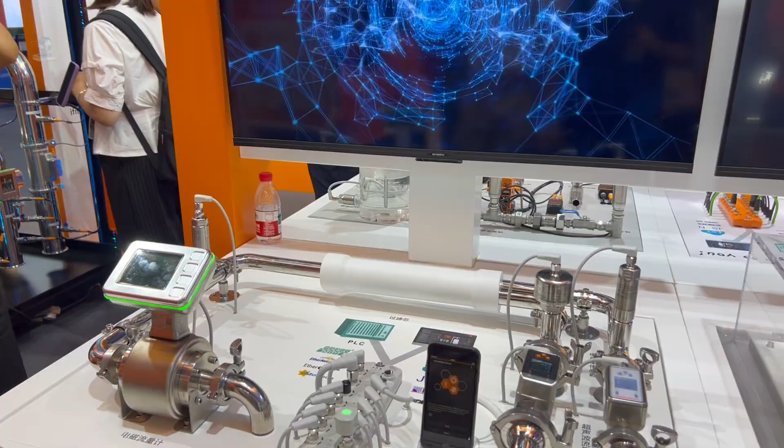Beyond pure tech and market share, we also have to talk about the massive geopolitical and trade shift reshaping this industry right now. Western economies have rolled out strict carbon border adjustment mechanism CBAM starting in 2026, imposing heavy tariffs on marine vessels and offshore equipment with high carbon footprints. This policy was originally designed to suppress emerging manufacturing nations and protect Western legacy marine brands. But ironically, it's backfiring hard on Europe and the US. Thanks to China's early breakthroughs in zero-carbon power, high-efficiency dual-fuel systems, and low-emission gas turbines, domestic marine hardware already meets the world's strictest carbon standards out of the box.

Meanwhile, many Western legacy engines and turbine models still rely on outdated high-emission designs that struggle to comply with new CBAM rules. This means Chinese marine equipment is not just cheaper or more powerful, it's now more trade-compliant and future-proof for the global low-carbon era. It's a huge structural advantage that's going to rewrite global supply chain rankings over the next 3 years.

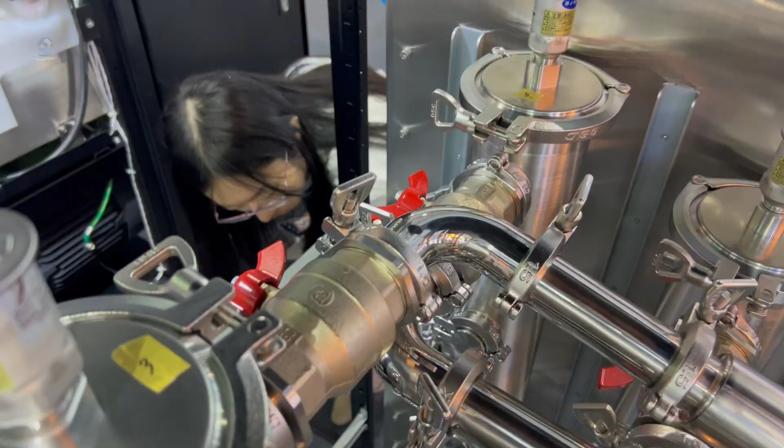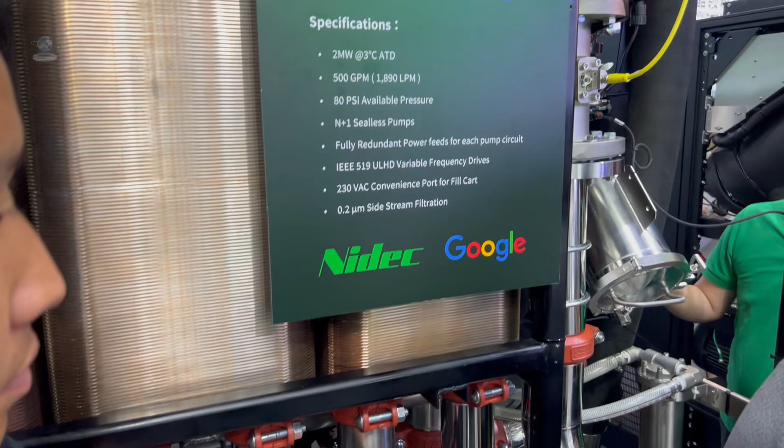Overall, the 2026 SIA Shanghai Marine Expo perfectly showcases China's full strength in high-end marine equipment manufacturing. From game-changing heavy-duty gas turbine upgrades to large-scale offshore wind gear and zero-carbon ship power innovation, every tech and product on display is pushing the entire global marine and shipping industry chain forward. This expo is far more than a simple industry showcase. It is a clear signal that the global marine manufacturing competition pattern has been completely rewritten. China has bid farewell to the era of following foreign technologies and relying on imported core equipment, and has officially stepped into the global leading position in marine high-end equipment R&D, manufacturing, and commercial application.

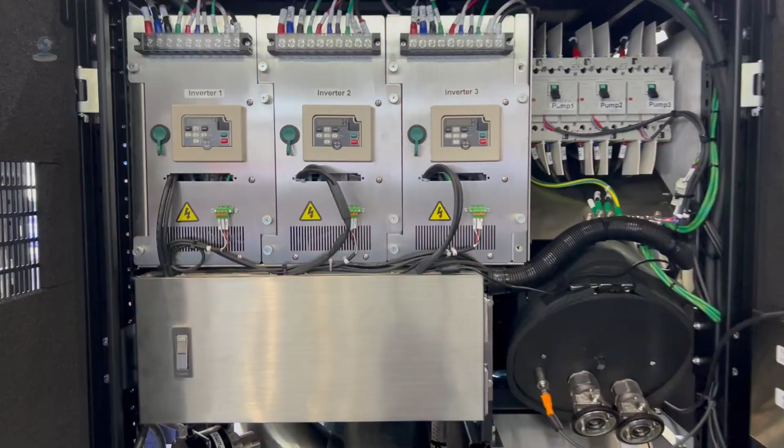Overall, the 2026 SIA Shanghai Marine Expo perfectly showcases China's full strength in high-end marine equipment manufacturing. From game-changing heavy-duty gas turbine upgrades to large-scale offshore wind gear and zero-carbon ship power innovation, every tech and product on display is pushing the entire global marine and shipping industry chain forward. This expo is far more than a simple industry showcase. It is a clear signal that the global marine manufacturing competition pattern has been completely rewritten. China has bid farewell to the era of following foreign technologies and relying on imported core equipment, and has officially stepped into the global leading position in marine high-end equipment R&D, manufacturing, and commercial application.

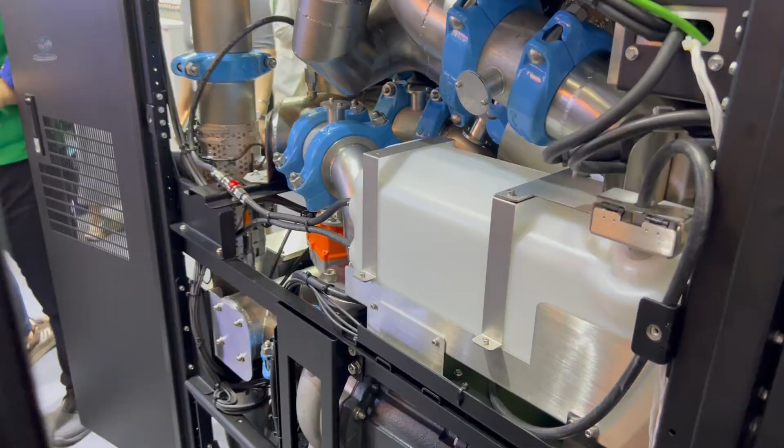Honestly, after walking this entire exhibition floor and cross-checking every parameter, every new build, and every market trend today, I'm genuinely impressed. This isn't incremental improvement, it's full-spectrum industrial overtaking. A decade ago, we were importing every core marine power component. Today, we're building more efficient, more reliable, greener equipment that's ready to compete and win on the global stage.